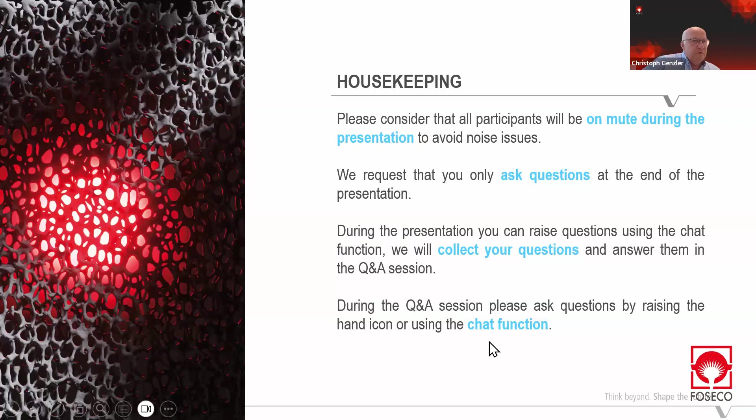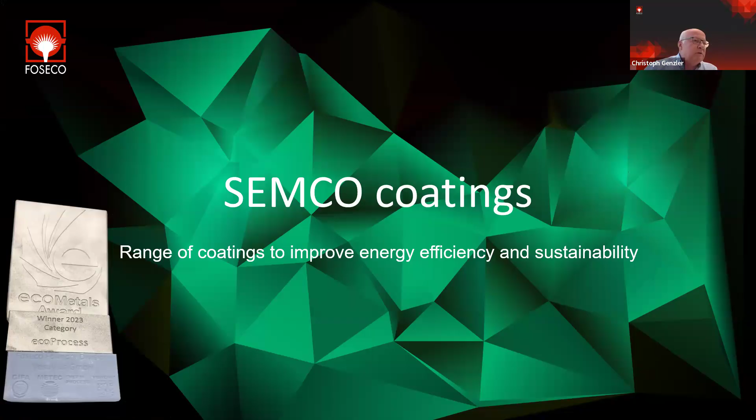Semco coatings, what are they? They are a water-based product range within Foseco, which we actually reintroduced back in 2023, and we won the EcoMetals Award for that during GIFA. What is the motivation behind that? Well, the motivation is definitely that molding core coatings influence foundry manufacturing cost dramatically. It is a known fact, but the influence on sustainability is not always that obvious.

So listening to our customers and their demands, new features of coatings have been developed in response and are now widely appreciated by users, such as Semco CC for color changing coating on drying, so you will see how the coating can actually change color while it's drying. FD, Semco FD for faster drying, obviously faster water-based coating drying. And the last feature, which is pretty much standard by now, is the FF version, which means we will not have a coating from Foseco supplied that releases formaldehyde while it is drying.

What is the Semco coating range? In general, a new family of water-based coatings designed to overcome the shortcomings of traditional water-based solutions. These coatings help foundries to cut energy use, improve casting quality, and thus reduce operating costs and scope 2 and 3 carbon emissions. I'm coming to what that really means. With the development of biocides that do not release formaldehyde anymore while we dry the coating, they also improve the overall health and safety in the foundry as a nice side effect.

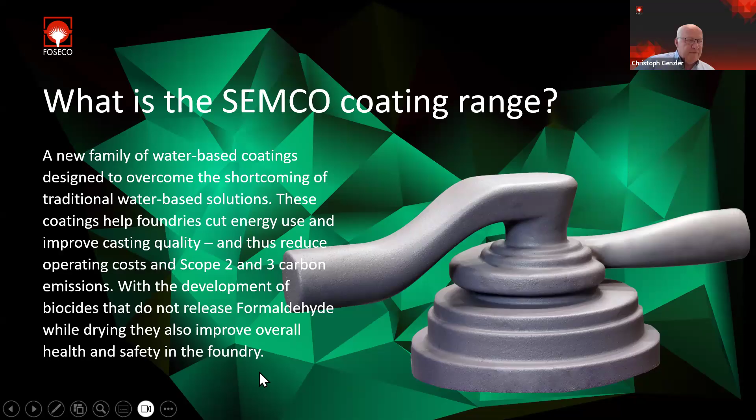Scope 2 and 3, maybe they are not that much known in Turkey, but in Europe it's really a big thing.

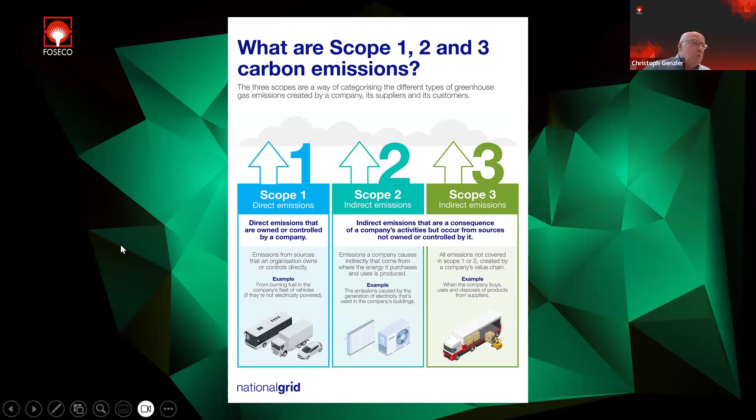Scope 2 and 3 CO2 emissions are indirect emissions common to your processes, like your molding line, drying furnace, core shop, or cupola. As soon as that releases CO2, the consequence is that you will have a scope 2 or scope 3 emission level, which in Europe at least we sell certificates for. So it's quite a cost-intense feature.

What can our coatings do? Our Semco coating range that I'm trying to introduce to you will help minimize 50% of the drying time. In other words, it will dry 50% faster compared to conventional water-based coatings. It can save up to 20% energy on drying, and in terms of formaldehyde, it will reduce the formaldehyde emission by a minimum of 90%.

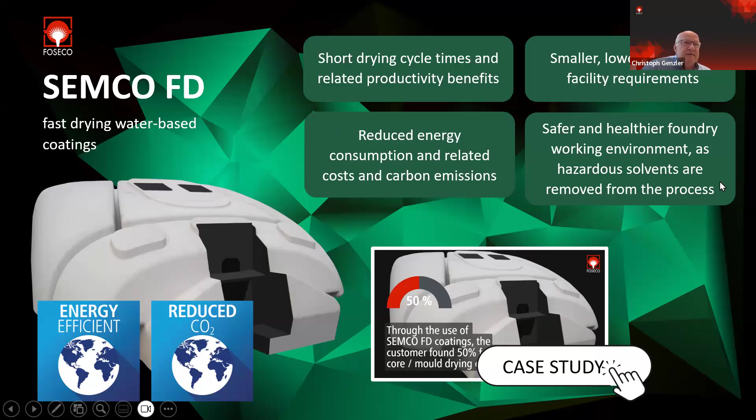Okay, let's go into more details. Fast drying coating - what does that mean? It's a water-based coating applied by dipping, brushing, flow coating or whatsoever, and it will reduce the drying cycle time and offer related productivity benefits. It will shorten or reduce the cost on drying and facilities that you need for drying. It will definitely reduce energy consumption and related costs, and it's a safer, healthier foundry working environment as hazardous solvents are removed from the process.

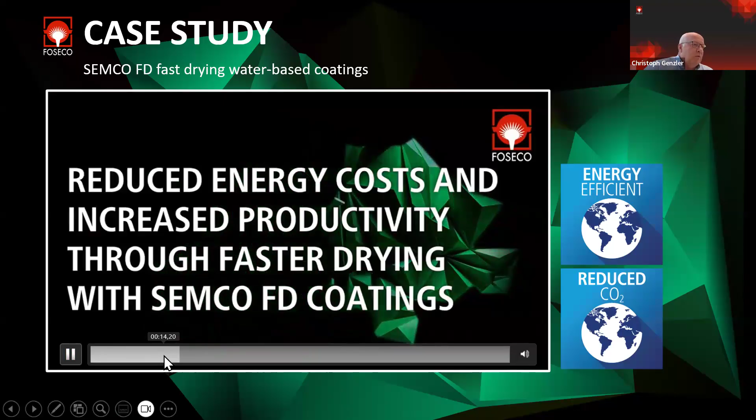Here, I hope you can see the video. It's a short case study on a windmill casting - actually a core made for wind turbines, a wind turbine casting that was coated with Semco FD. Please bear in mind, let me go back, that you see a whitish surface, because I'm coming back to that.

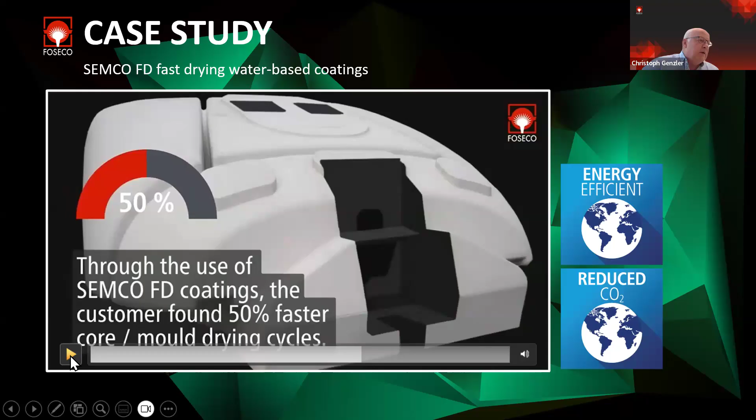The challenge was, and still is, the customer wanted to improve core shop output by accelerating the coating drying rate, and we had to do something. We had to invent the faster drying water-based coating. In this case it was designed for flow coating application, and with that feature of fast drying we enabled the customer to get 50% faster cores or molds out of his core shop or molding line, improving his productivity. As a side effect, we significantly reduced CO2 output due to much less energy consumption in the drying process itself.

Yes, Semco CC for color change coating. We will visualize very nicely the drying process. We have saving potential on the drying temperature and drying time - I'm coming to that. We can, with that feature, further reduce CO2 emissions and optimize energy consumption. It is a reversible color change.

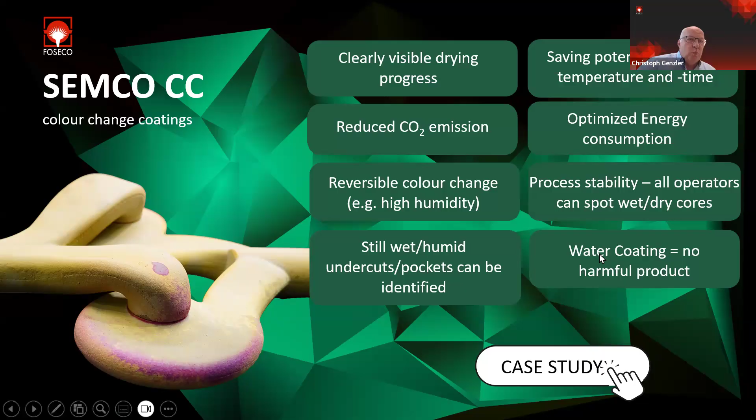That means, for instance, in high humidity seasons like autumn when it's very humid, you will see that the color of the core changes back to the wet color. It also employs process stability, meaning pretty much all operators can spot wet and dry core areas. Still wet or humid undercut pockets can be identified, which reduces the risk of facing gas defects. And it's a water-based coating, so it's not a harmful product at all.

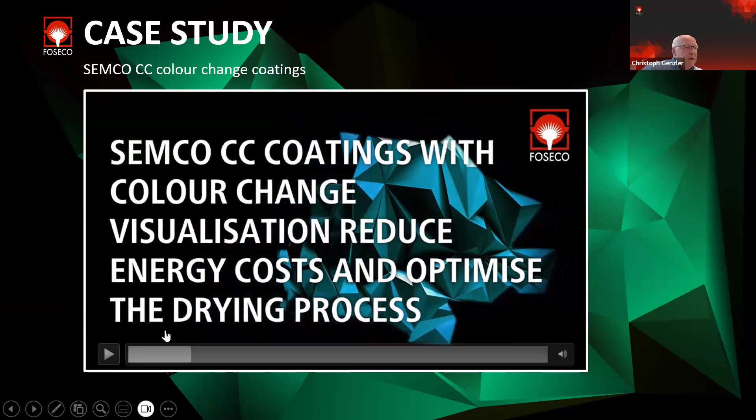Here, once again, the case study. Coating with the color change visualization reduces energy cost and optimizes the drying process. That's a pump housing from a German foundry called Baumgarten, and the coating you see here is designed for dipping.

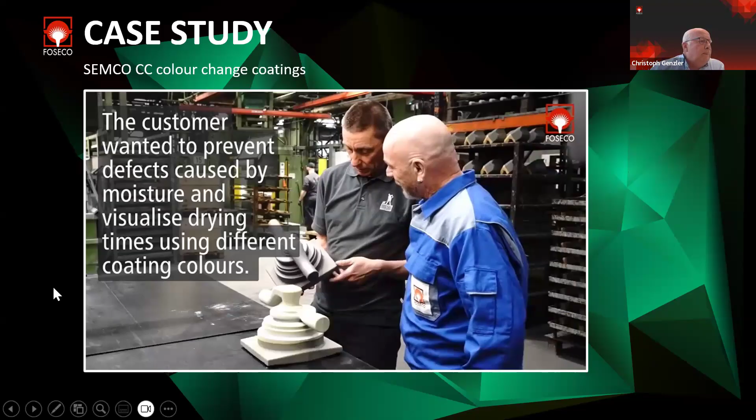Now what you see already is a core that's just coated, in both a wet condition and a dry condition. The customer wanted, as a motivation, to prevent defects caused by moisture and to visualize drying, which was in those days a nice request from the foundry that we, I must admit, hadn't really thought about before. So as a side effect, we could optimize the drying process.

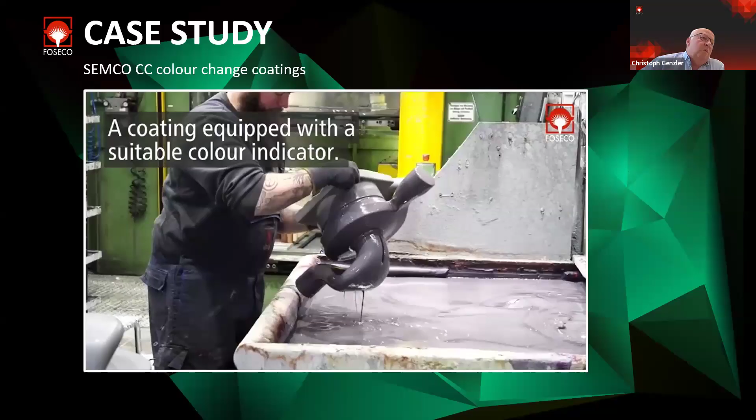You see, it's quite a nice flowing dip coating. In wet condition it's grayish purple, sort of. Now this is what I mean - still wet surface, dry surface. As soon as this water spray, basically in the hand of my colleague, gets sprayed on the surface, you see the color changes back to purple, to the original color, which may not seem important at first, but I will show you where it really makes sense.

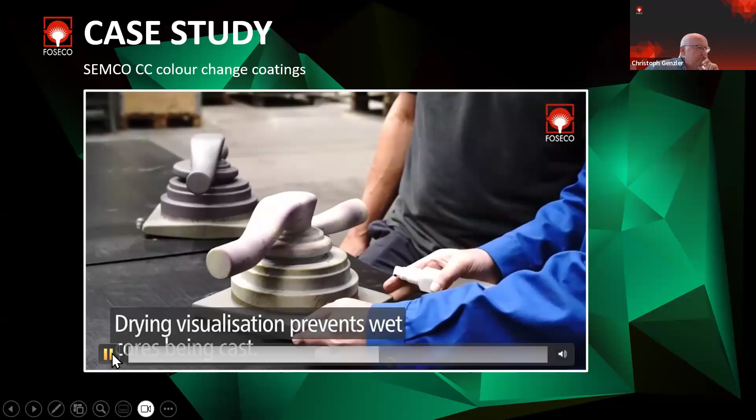Still wet surface - talking about the flow regime of the coating, how the coating is actually leveling.

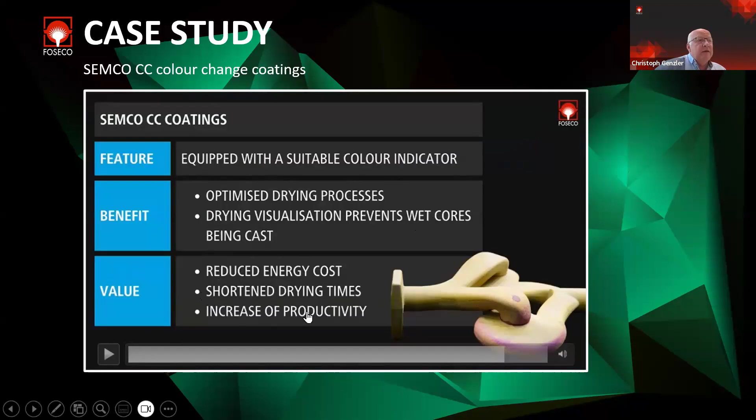So the coating itself showed quite nice benefits, such as optimized drying process, drying visualization prevents wet cores being cast. We had reduced energy consumption by 20%, shortened the drying time, and increased, of course, the productivity.

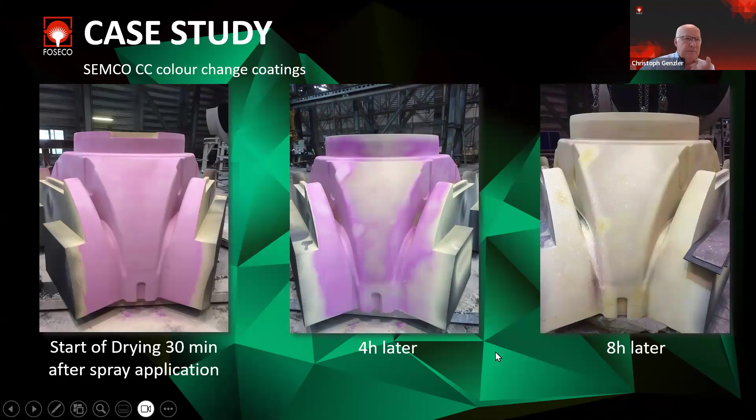Now the same feature applied for big molds or cores. Here, once again, that's a hub core for a windmill casting. You see the coating being applied. It's kind of pinkish, but as soon as you start the drying process, you can visualize very nicely how the drying progresses over that period, whatever the period is.

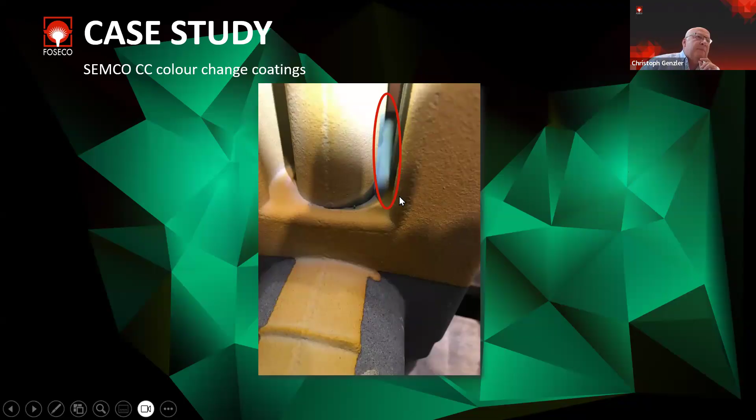Now, as a nice side feature coming from that development together with the Baumgart customer in Germany, we discovered that in particular in areas that are not that obvious and usually overlooked by an operator, you can very nicely spot still wet patches on the core surface. In this region, in this pocket, you still see nicely how the coating, after drying, after being in the drying oven, is still wet.

So from that perspective, just with the coating, with the color change coating, we were in a position to optimize the drying process. Having said that, what we also discovered is that while the coating is dried, the color change continues. In other words, the hotter the oven environment is, the darker the color becomes.

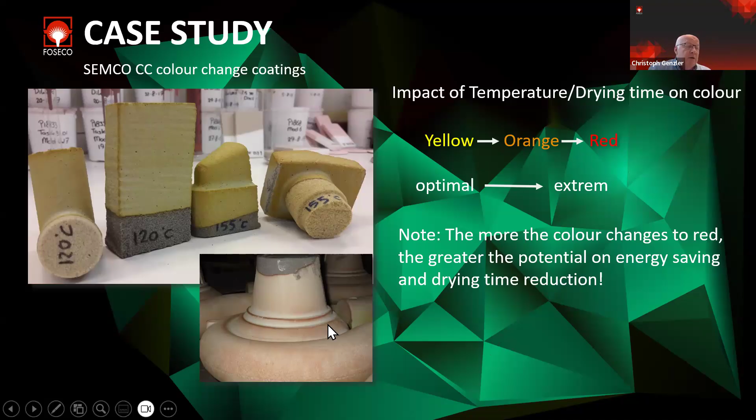So for instance, a normal dried core set at 120 is pretty yellow. The more energy put into drying in that furnace, the more that yellow changes to orange and furthermore develops into red, like you see here. So the more reddish core surface you see after drying, the greater the potential for energy saving, and of course still reducing drying time in the furnace.

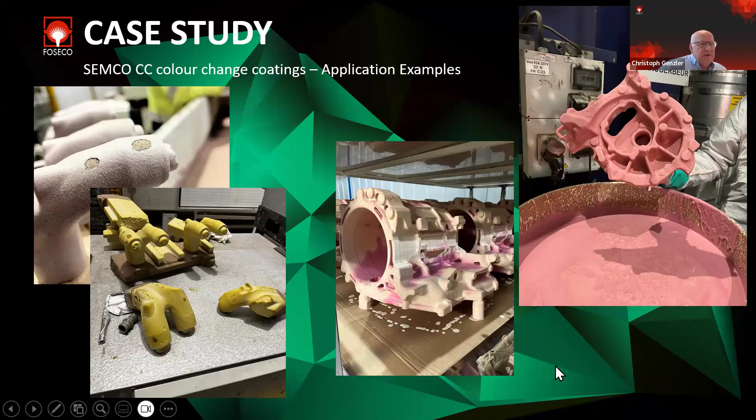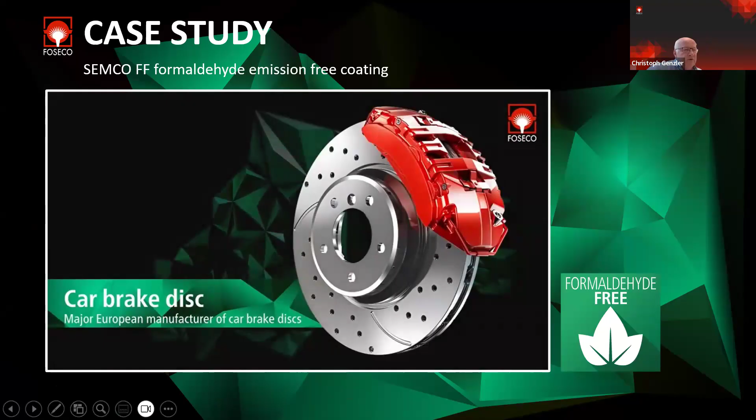So we had to do something, and we developed a biocide basically inside the coating that does not release formaldehyde during the drying process anymore, and hence we reduced the released formaldehyde gases by about 90%.

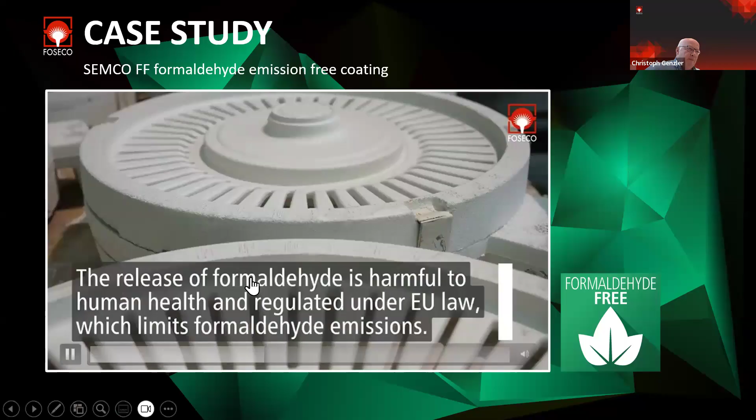I don't want to bother you with that so much. It was a new EU law. Yes, our solution was basically that we had reduced almost all formaldehyde emissions, and we had enabled the customer to comply with the latest EU regulation. Of course, for the operators, it was much better for the workspace as a working environment, and we could avoid the investment of costly rectification measures such as an afterburner and these kind of equipment.

Yes, so for you, I would like to remember, or make sure that you remember, that all these Semco coating ranges can be tailored to your customer demands. So regardless of the application, whether it's flow, dip, spray, brush, whatsoever, we can tailor make all these different features into your coating that is designed for you. And of course also bundle, say, fast drying with color change, or just color change, or just fast drying. That is then dependent on the demand of the individual customer.

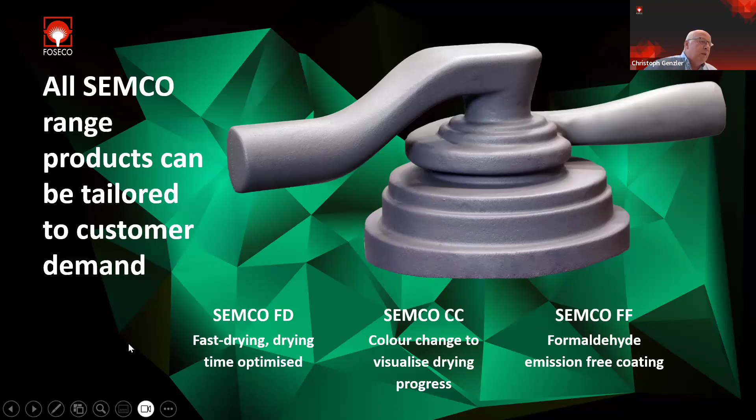Having said that, I told you at the beginning I would also like to introduce you to something that is really required to optimize the coating application. Nowadays, coating is more or less a cost-related feature in the casting manufacturing process. To get the best and biggest benefit out of a coating, that is always a gamble, so to speak, whether or not your operators are fully skilled and experienced enough to optimize the application.

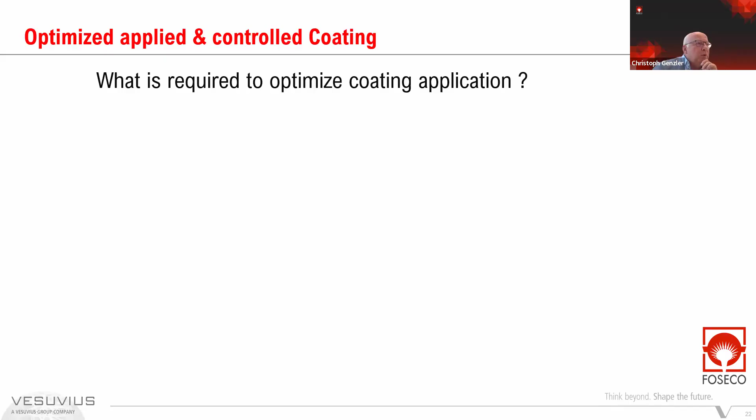From our perspective, to apply a coating in an optimized way, you need kind of an automation to control, to adjust, and maybe also to prepare the coating that is coming into your facility, into your plant. In that context, we have designed, as you might know, the so-called ICU. The ICU stands for intelligent coating unit, and that is automating the coating application.

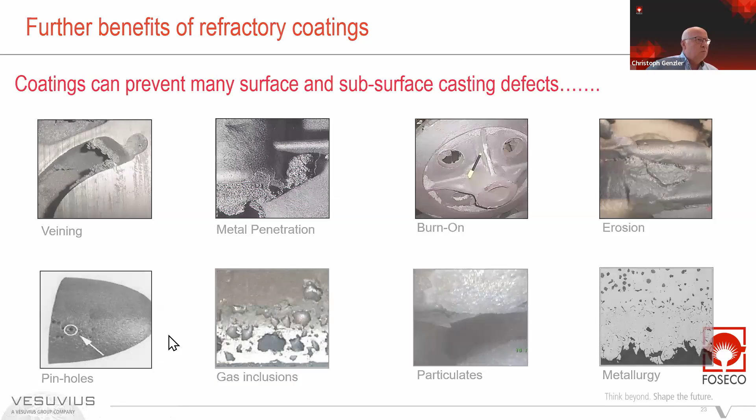This automation will help the coating to prevent many surface and subsurface casting defects like veining, penetration, burn-on, internal particulates, metallurgical issues, erosions, and pinholes, because once the coating is not properly applied, it can create problems itself. It can create runs and drips, brush marks, cracks on the corners, foaming, scabbing, poor adhesion, sedimentation, and blistering, and all these types of defects.

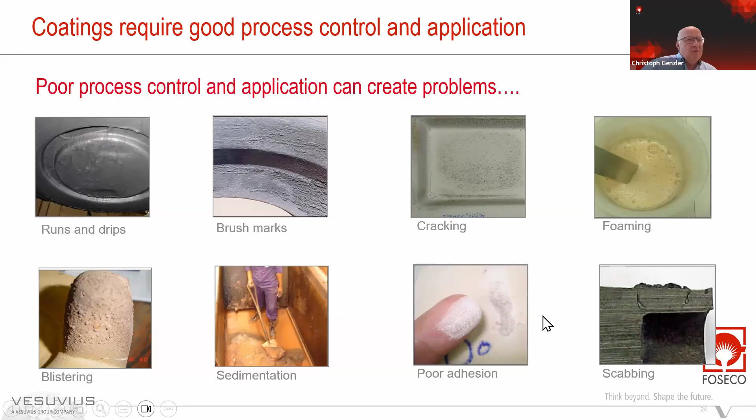That is why we introduced the ICU, that helps to automate layer thickness measurement. The layer thickness measurement is usually and ideally done by using a layer thickness gauge that helps to determine the wet layer thickness. A too thin applied coating layer makes the coating not really effective. Too thick and the material is wasted, plus the risk of dimensional issues, scabbing, excessive runs and drips. So a wet layer thickness and the related dry layer thickness is a very good proxy, a very good measurement, for the dry layer that is ultimately important.

Normally, in your core shop, on your molding line, you apply a Baumé or a flow cup kind of measurement to determine parameters of the coating. These parameters are then viscosity or Baumé density, which gives you an idea about the layer thickness you apply. Both methods are open to operator interpretation, which is in itself quite a risk.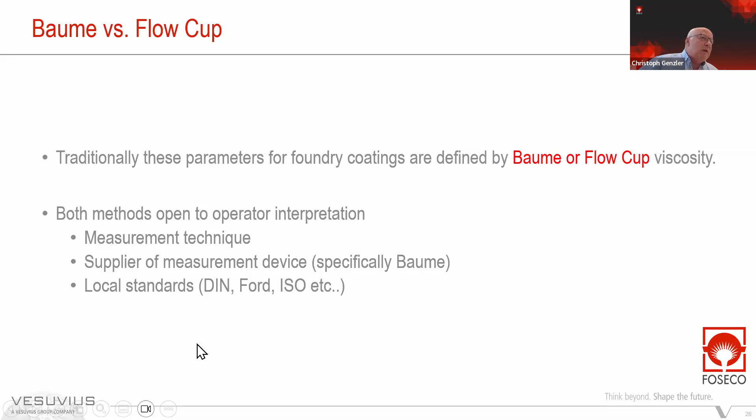We have local standards in terms of the flow cup viscosity, like DIN cups, Ford cups, ISO cups, and so forth. In order to remove all that confusion, I think the best way is still to use density as the ultimate coating adjustment measure. I will show you why.

Just imagine that in your process you have a specification of the coating, either viscosity or Baume. In this case, Baume is 28 plus minus 1, or viscosity of 15.5, which is already quite accurate, plus minus 0.5. In both cases, within that specification, you will achieve a wet layer thickness that has a difference of about 70 microns. Now, some of you might say 70 microns is not really that important, but these 70 microns will determine whether your casting gets out as a good casting or might see some issues, some problems.

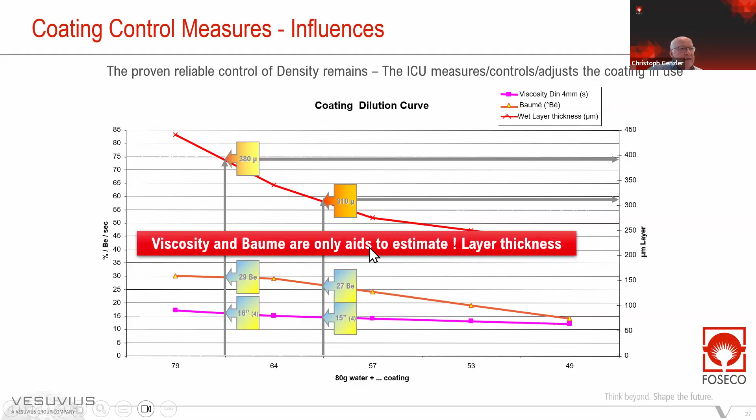Viscosity and Baume are only aids to estimate layer thickness. Because at the end of the day, if you compare that to the density measure, you see that density perfectly correlates with a dry layer thickness.

The correlation is kind of logical, because at the end of the day you apply solids, and the solids are then determining the density of the applied coating layer. So the density correlates wet and dry coating very, very accurately.

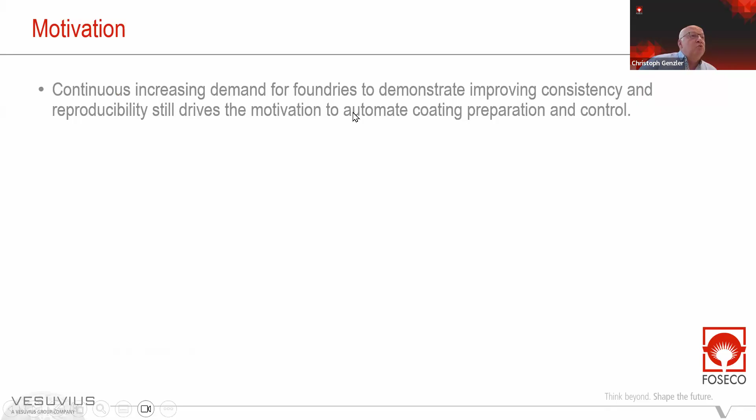Now I'd like to introduce you to the working principle of the ICU, the coating automation. So to make sure that you understand our thinking behind that process, behind that machine - the motivation, once again, is the continuous increasing demand for foundries to demonstrate improving consistency and reproducibility, which still drives the motivation to automate coating preparation and control to a very high degree.

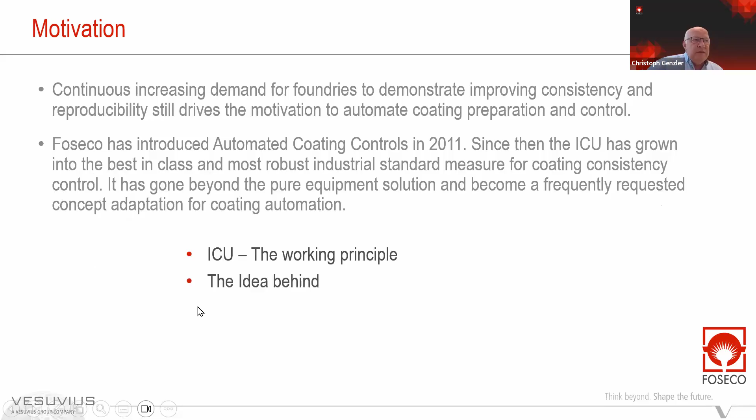We introduced in 2011 already the concept of coating automation. Since then, the ICU has grown into the best in class and most robust industrial standard measure for coating consistency and control, and it has gone beyond the pure equipment solution and become a frequently requested concept adaptation for coating automation. So I'm going to show you now the working principle, the idea behind the ICU itself, some options, and maybe if we still have time at the end, the applied concept.

Now, the working principle is a little bit down to physics, and it's basically down to this equation, and how this equation develops is shown in that quick short video sequence.

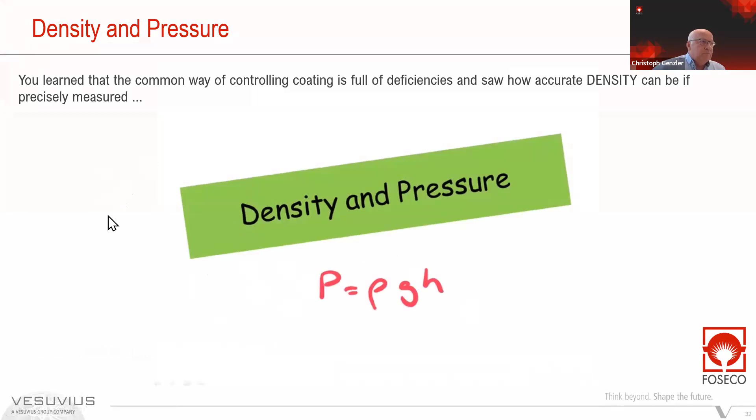Hi guys, today I want to talk to you about density and pressure. So what is density? Well, density is the ratio of mass to volume, and here we've got a...

Excuse me, can you hear me? Can you hear this voice? Yes, the sound is coming, it's okay, clearly coming. Okay, thank you.

The equation to calculate density, with the symbol rho, is measured in kilograms per meter cubed. To find out the value of density, we take the mass of an object in kilograms and divide it by the volume of the object in meters cubed.

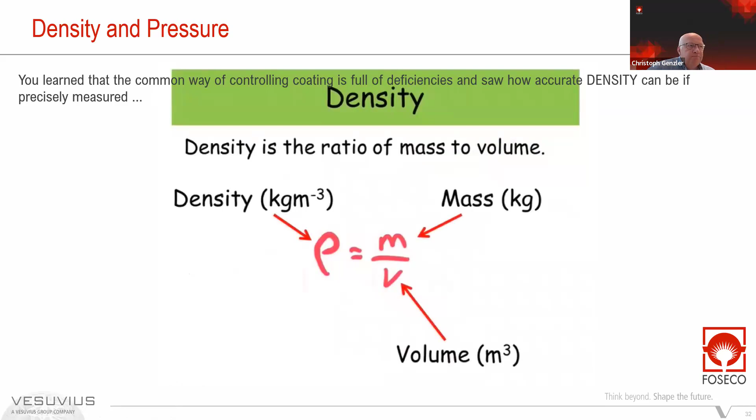So what about pressure? Well, pressure is the ratio of force to area. Pressure, measured in pascals or newtons per meter squared, is equal to the force divided by the area in meters squared.

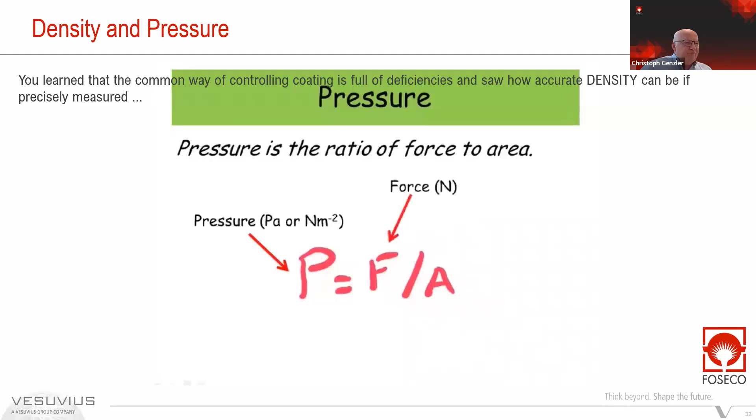The relationship between pressure and depth: for a given liquid, pressure is directly proportional to the depth or the height of the liquid. In other words, regardless how deep in a dip tank, in a coating container, wherever you go, you have always the same pressure to height proportion.

So pressure equals rho GH, and I'm going to show you where this equation comes from. If we've got pressure and height in a liquid, the gradient of this graph, which is pressure divided by height, is actually gravitational acceleration times the density rho of the liquid. So the further down we go, the greater the pressure.

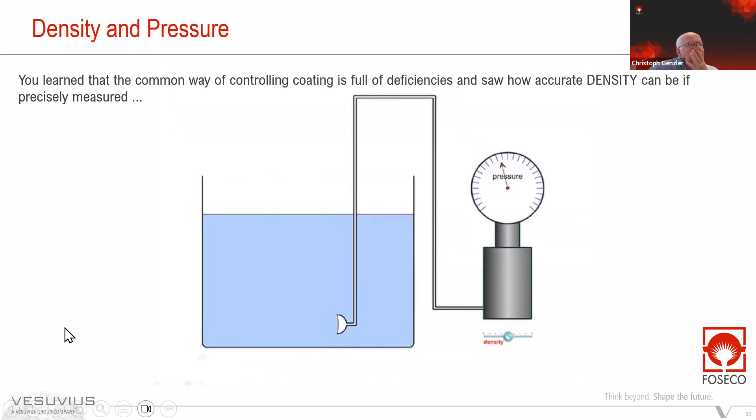Obviously, the further down we go, correspondingly the equation changes, and the density will remain the same, calculated down to the same value, okay? And if I've got a liquid with a higher density, it will also have a greater pressure. So pressure equals rho GH.

Where does that equation come from? Well, firstly, you think of a cube with a weight or force acting down at the bottom there. Our cube of liquid has got dimensions L, so it has a height of L, the width, and the length all of L.

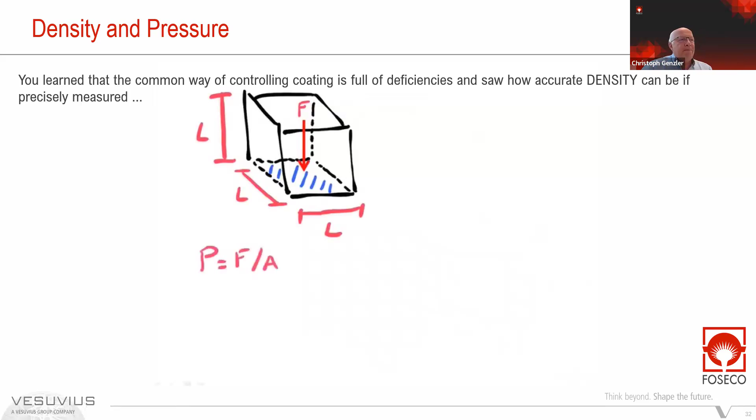So we know pressure equals force divided by area, and in this case the force is equal to mg. We also know that the density is equal to the mass divided by the volume. Rearranging that, we get the density times the volume is equal to the mass, and we put this all into our equation at the very beginning.

So we get pressure equals rho v times g divided by a. We know a is equal to L squared and v is equal to L cubed. So pressure equals rho L cubed g divided by L squared.

We can simplify this as rho Lg. And what's L? Well, it can be the height of the liquid, so we get pressure equals rho GH. Simple as that. So at the end of the day, the pressure is proportional to the density, the gravitational acceleration, and the height of the liquid.

This all means basically that in the ICU, where we use multiple pressure sensors, we can check densities at different levels. The biggest advantage we get through this kind of arrangement is that we measure density 1, density 2, density 3, and in case these are not the same, meaning the coating has a problem in terms of sedimentation or bacteria attack, we get an alarm and immediately either start the mixing exercise or make some other impact on the process.

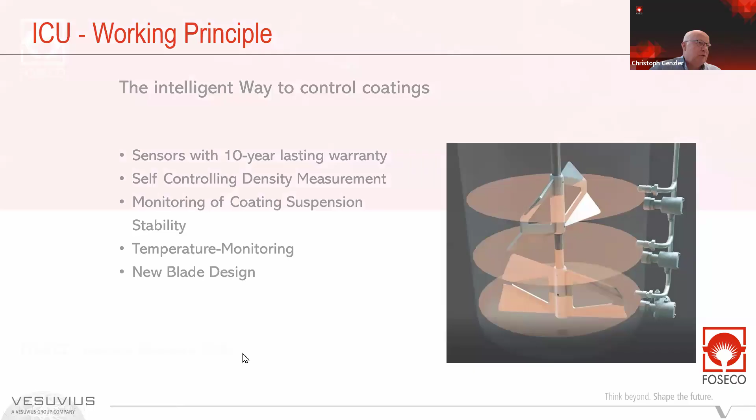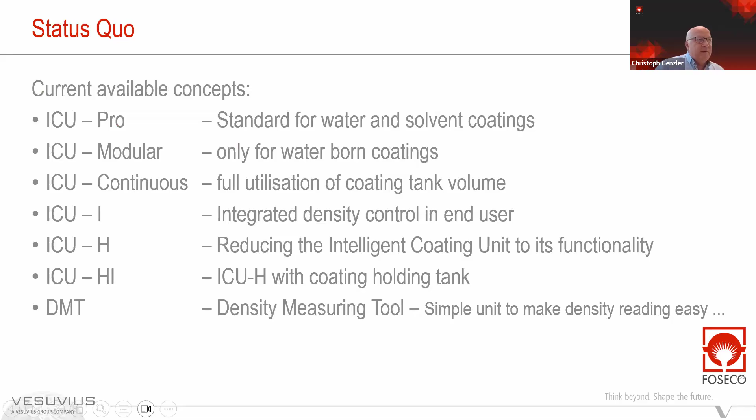So in that context, the ICU introduced back in 2011 has now grown into a rather big family. In order to not confuse you too much, I'd like to introduce you to these 5 different features: the continuous ICU, which is sold pretty much everywhere globally, and then the latest requirements on the integrated feature, the ICU-I, reducing the ICU basically to its heart, its brain, and how we can introduce that heart into a coating holding tank directly.

And the DMT is just a density measuring tool, very simple to use, and maybe replacing Baume sticks or viscosity cups in the near future.

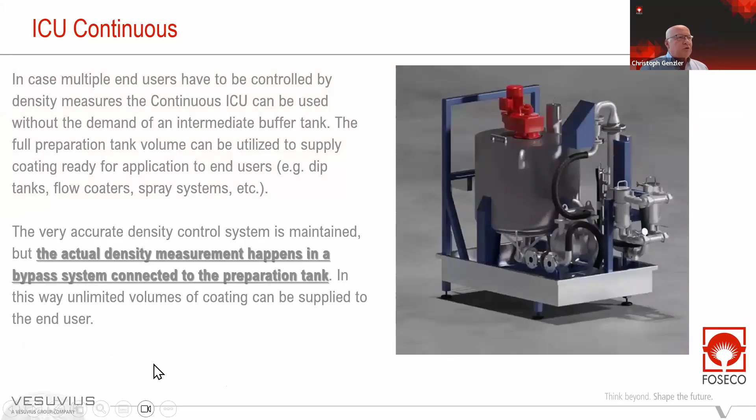The ICU continuous looks like this. We learned during the introduction phase that if we connect a lot of different end users, such as dip tanks or flow coater stations, to only one ICU, we had to stop the coating supply from the ICU to the end user when the coating was consumed - in other words, when we had to refill the volume in the holding tank.

With the ICU continuous, we don't do that anymore. We can utilize the full capacity of the tank to supply the end user - flow coater station, spray equipment, or dip tank, whatsoever - because we have removed the measurement from inside the tank into that measuring pipe. So there's always a 24/7 continuous, safe circulation of the coating inside the tank through that measuring pipe, and the coating gets adjusted just by measuring inside the pipe. This enables us to supply the end user continuously, which is very important. I think with other machines out there, that's not possible - it's just possible with the ICU.

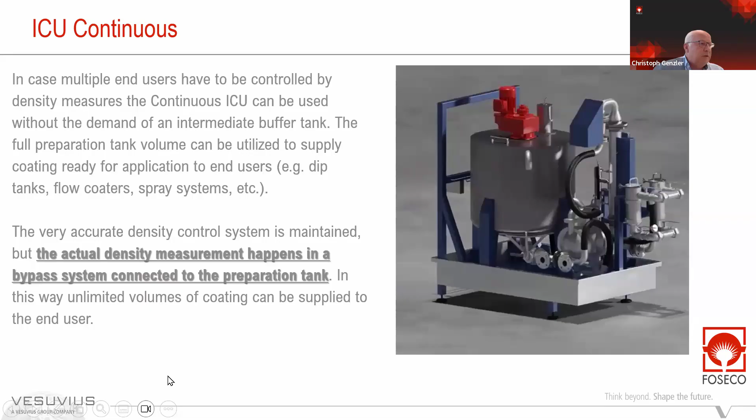On top of that, there are still available options, such as a spillage containment tank underneath the device, and the coating inlet into the tank guided by the stirring shaft just to reduce splashes.

Sensor cleaning nozzles, 3 instead of just 2 sensors. We have Vega pressure sensors, Wilden membrane pumps, covers for the sensors, temperature monitoring for the coating in the tank. Quite interesting, an external stirring motor socket like this, and the timer for the mixer sitting on the container. So when you have a container supplied by us and the corresponding mixer sits on the container, the ICU can organize the mixing sequence onto that container.

Of course, there's also a single or double filter function, UV treatment for disinfecting water - quite important sometimes to reduce bacterial attack, especially in summer. We have a built-in cleaning function and a built-in verification or self-testing function that helps the ICU always supply the correct readings.

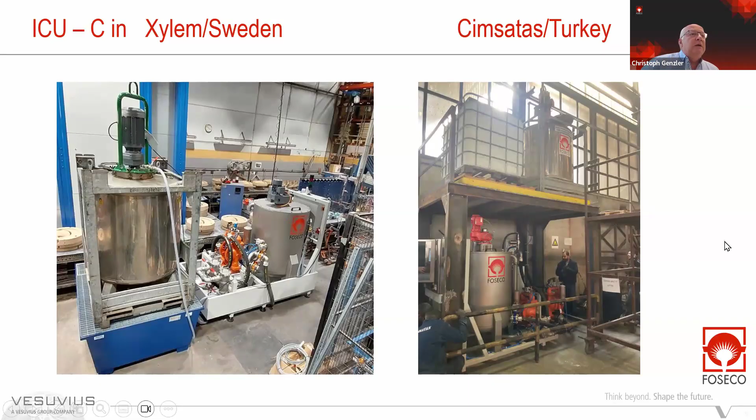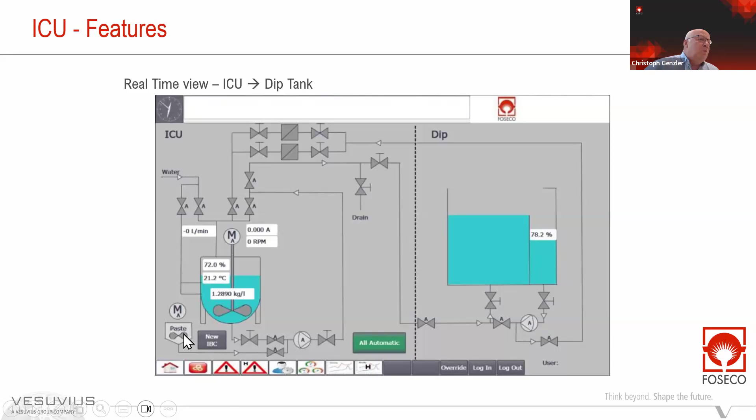Real-time view of the ICU itself. In this case, the ICU was connected to a dip tank, so you see we get the reading of how much the dip tank is filled, and different parameters of the ICU itself - the temperature of the coating inside the tank, the filling rate of the coating inside the tank, and the speed of the mixer and which function is currently being used, such as a pump or just a valve that opens and closes - plus a very simple press button exercise. So when the coating has to be changed on the container, the operator just presses a button, and that's it. The ICU does all the rest for him.

Having said that, we've also learned during the introduction that the maintenance department usually has different requirements, different demands, and this is the maintenance screen that is now embedded in the program to show that all the different components are running, and in which case they have to be maintained or controlled and so forth.

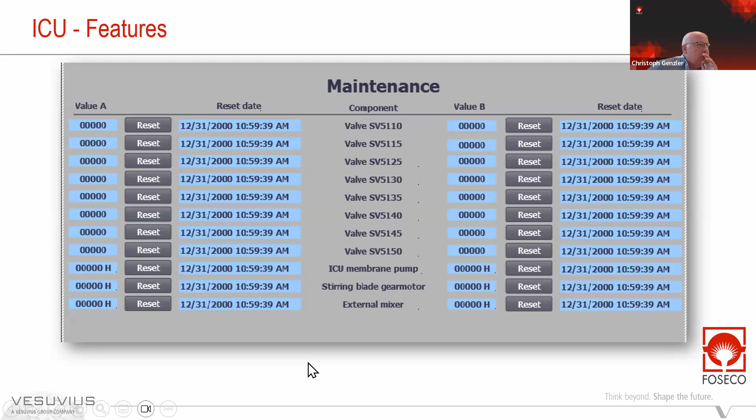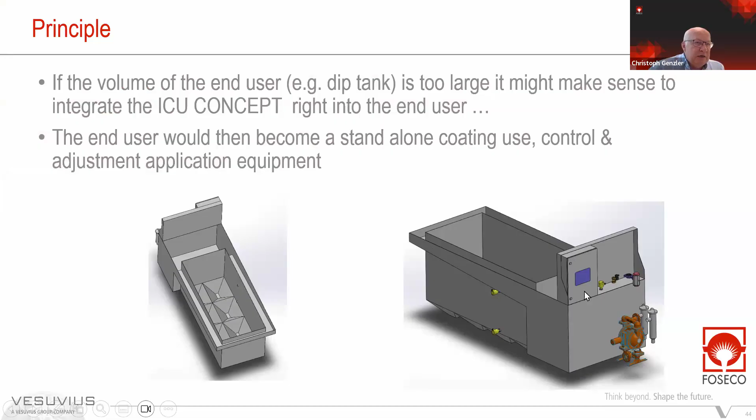We were talking about the ICU concept. The ICU-I, the integrated ICU, is one of these concept ideas where we basically introduce inside the dip tank just the two pressure sensors, and have the ICU brain, the intelligence, sitting on a side panel. And this is how it looks like.

We also attached a small flow coating hose, so in case smaller cores wanted to be or had to be flow coated, we could use this flow coating hose to just flow coat the core straight over the dip tank.

The ICU Integrated is one of the latest responses that we can supply to customers that just want to have the density control. Now, this comes with a control box, 2 pressure sensors, and some valves, and then it is directly connected, as you see basically in the integrated version, onto the process inside the dip tank.

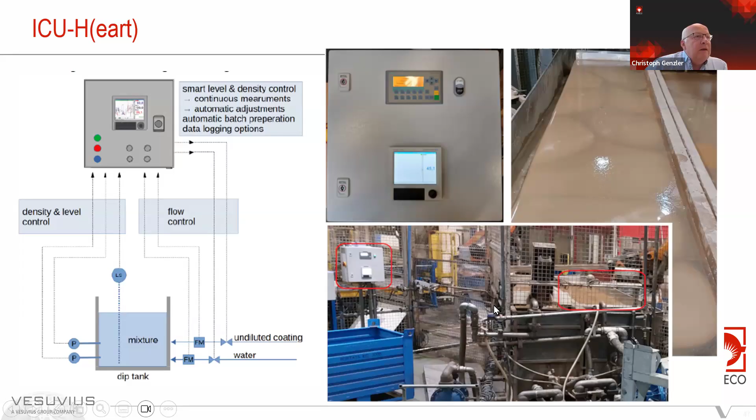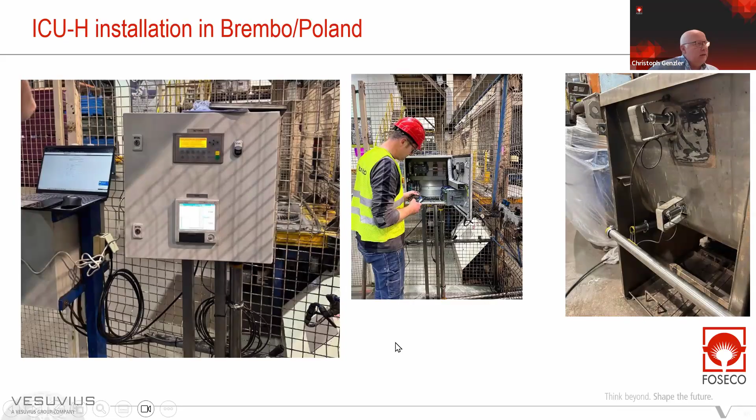Here is the intelligence. On the next slide you see the pressure sensors being mounted on the dip tank. This is the dip tank, by the way. So it's been built into that dip tank, connected with the brain, the intelligence of the ICU, and that's how we can integrate the ICU features, the ICU functionality, inside the dip tank. That's why we call it integrated.

Some customers do not have the option to have big dip tanks or flow coat stations. In these cases, we can supply the ICU-H, which means the heart, once again the brain, is integrated directly into a sizable tank where we circulate the coating, control and adjust it, and send it to the end user. In that context, it's a very small and flexible way of measuring density in a very controlled way.

Last but not least, the DMT stands for density measurement tool, now in its third generation, very simple to use. You just stick these two pipes inside the coating, wait some seconds, and then get the reading. You read density directly from the device, which I think is only available at Foseco. Nobody else, not even the paint industry or anybody else in the liquid industry, has this kind of feature to measure on site.

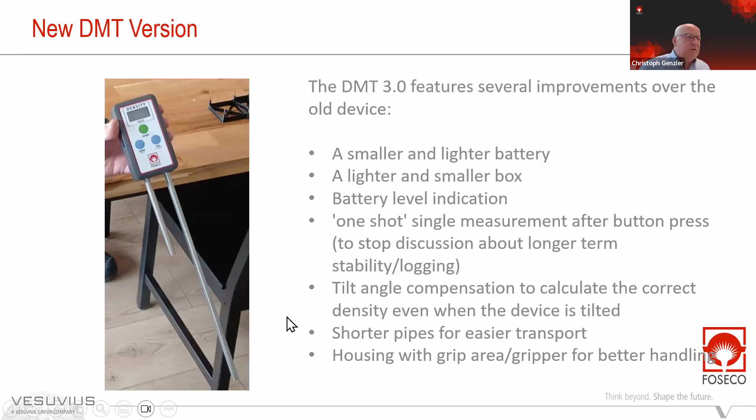The density. I must admit the device is not meant for continuous measurement. It is meant to replace Baumé sticks and flow cups, for spot-wise control, one-shot control basically, measurement after the button is pressed. It's very simple to use, and the size is a little bit bigger than a mobile phone maybe. It also comes with a battery, so it's quite simple to use.

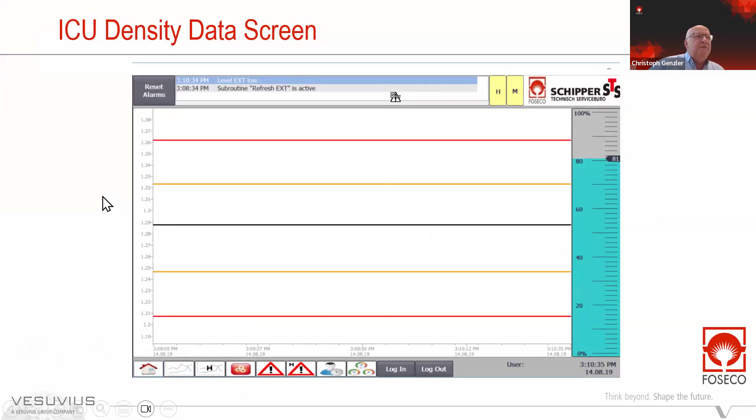Just to give you some ideas about the ICU functionality again, we have two different specifications on the ICU that we can set ourselves in whichever way we want. We have the alarm spec, which in this case gives a 5.5% alarm spec, and in this case it is the normal control, inner spec sort of, in which the ICU operates continuously.

In this case, very early in the process, you saw how accurate the ICU actually measures, at an offset of 0.04%. That is so accurate that you cannot even think about measuring this accuracy with a Baumé stick or with a flow cup. It's basically impossible for a human being to be that accurate.

However, I must admit, during that period, still within the introduction, I would say the offset of 0.04% is really the limit, because the machine starts to just control rather than monitoring, applying and readjusting. It just controls itself basically to death. So that does not make sense. Nice to see, but actually it's an overkill.

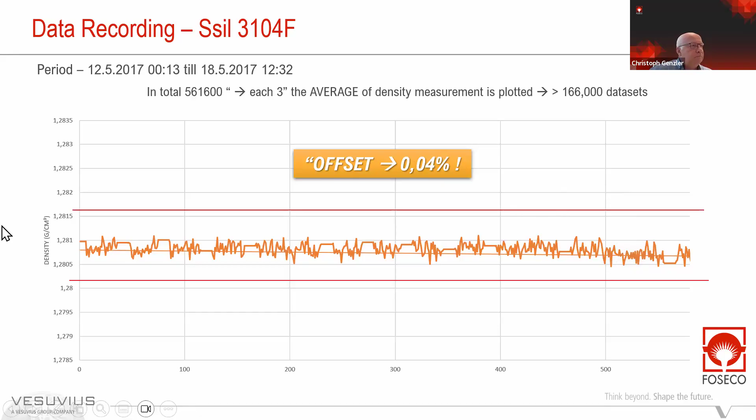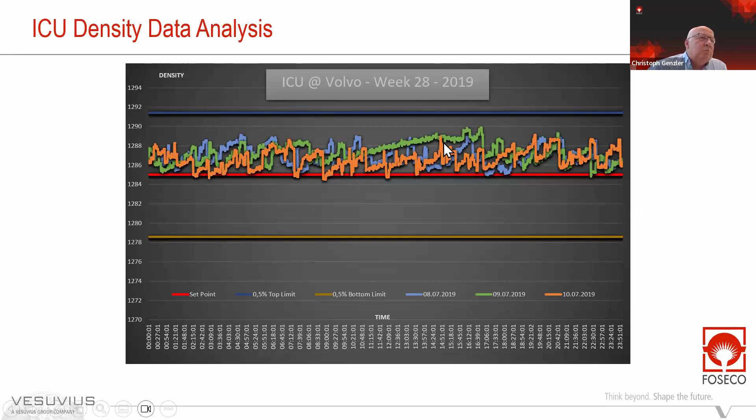So let me summarize then the key benefits of the ICU. It definitely helps to utilize the coating to the optimal degree. Excess consumption is avoided.

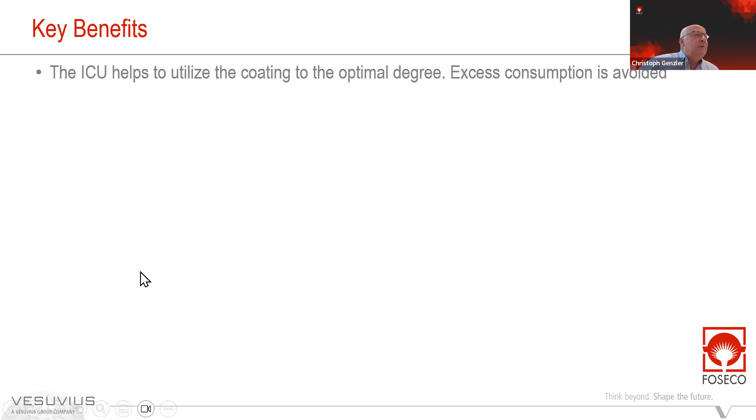The application layer thickness is maintained, meaning that you can optimize your drying because there's always the same drying speed, and the same layer thickness means also that you have the same performance against casting defects on all the cores.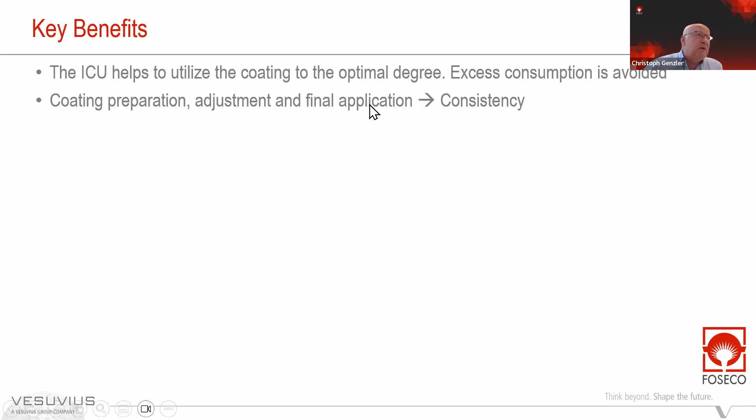The coating preparation, adjustment, and final application become much more consistent. The ICU works with the most accurate density measurement system in the industry. It's got a low maintenance level and a very low noise level, very easy to access.

It optimizes drying times, reducing energy and reducing CO2 release. Very simple to use, with 3 pressure sensors that test its functionality and supply sedimentation monitoring. We have data logging that lasts for more than a year.

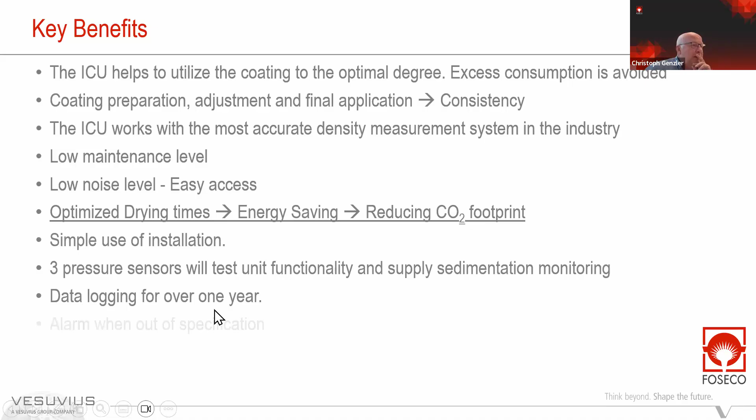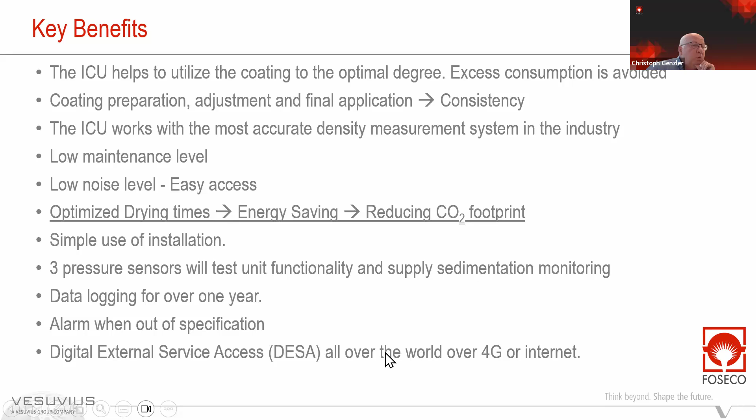And if needed, if requested, access to the machine can be done via the internet. So regardless where you are, you can always watch and monitor what's going on with the ICU in your molding line or in your core shop.

It's got a great solid design, foundry proof basically. It's got an integrated mixer timer and empty container alarm in case you need to convert to a new one. Yes, it minimizes coating waste.

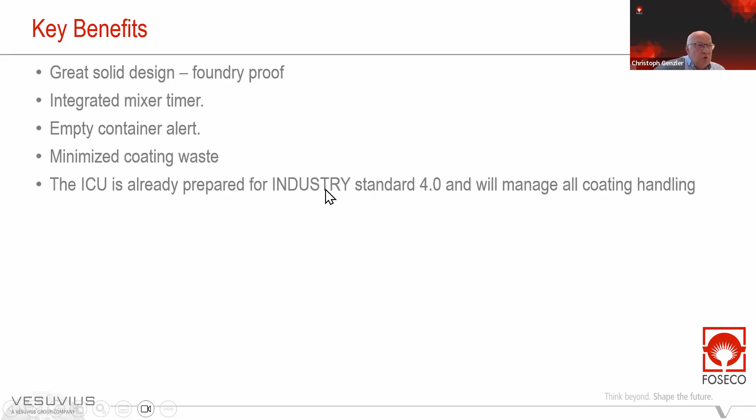The ICU is already prepared for Industry 4.0 standards. That means it can, if you want, talk to your other equipment in the core shop or on the molding line.

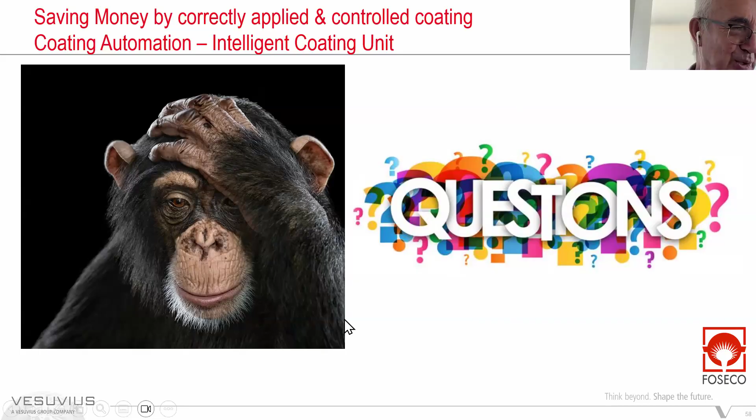The new thing is I see some traces of artificial intelligence. You did not mention it, but is it true that the intelligent coating unit is compiling too much info, and the operator has less to do?

Well, I would rather say the operator's life should become easier. Instead of taking all the responsibility into his hands, with temperature dependence, and maybe not being in the best shape on Monday morning or Friday evening, the ICU will still do the same job. So from that perspective, it's just more consistent and gives the operator a more relaxed time.

Okay, I am expecting questions from my colleagues. They started to write them down. During that time, we can go on chatting.

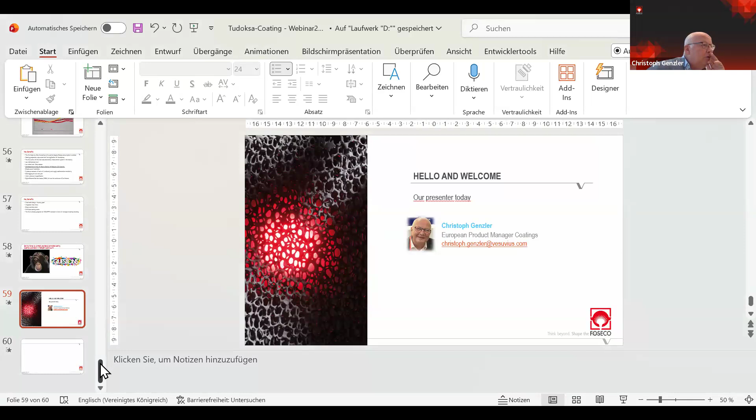So it seems that it is almost impossible to dismiss the operators in this operation. I'm not sure that's what you mean, that we can stop the operator's impact? Yes, we can. Let me just check, you still see my screen, yeah? Yes, we see.

In this case, we actually could release 1.5 operators from the line just because the ICU did the job of controlling, preparing, and measuring the coating in use on that line at Volvo. So that is possible for sure, and that operator can then do other jobs, other activities.

Okay, so the first question is coming from Mehmet Saadettin Turhan.

Christoph, the question is about whether there's any process to prevent the reduction in strength after coating and drying processes. He thanks you first for the presentation, then asks if there's a process to prevent any reduction of strength after coating and drying, to get some advice and opinion on these cases.

Well, to be honest, if the coating is applied, diluted, and prepared always in the same way, it should always have the same kind of strength levels or surface strength levels, if I correctly understand what you mean. Is that what you mean?

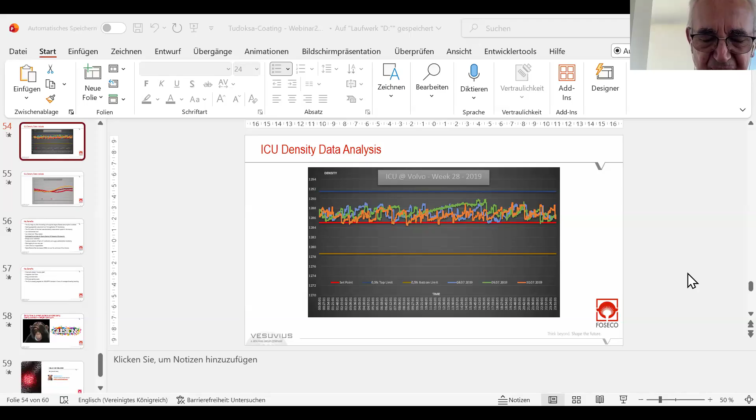What we have also learned—remember in the very beginning I told you something about the SEMCO CC, SEMCO color change—now, in order to optimize, let me see if I find that slide quickly.

In order to optimize the drying process for the customer, in this case to optimize the drying process for a cylinder head core package, a big one for the customer, we implemented the color change at the very beginning of the process, of the project, I should rather say.

That enabled the customer to optimize the drying speed to a degree that he could reduce cycle time by roughly 13 to 15 minutes. Can you imagine how many more cores that means and how the productivity improved in that case?

So this is an option to say, okay, we would like to optimize our drying process by a color change feature at the very beginning. Then once that is done, we can remove the color change again, and then you still run on an ideally optimized drying performance. Let me explain it also in Turkish way.

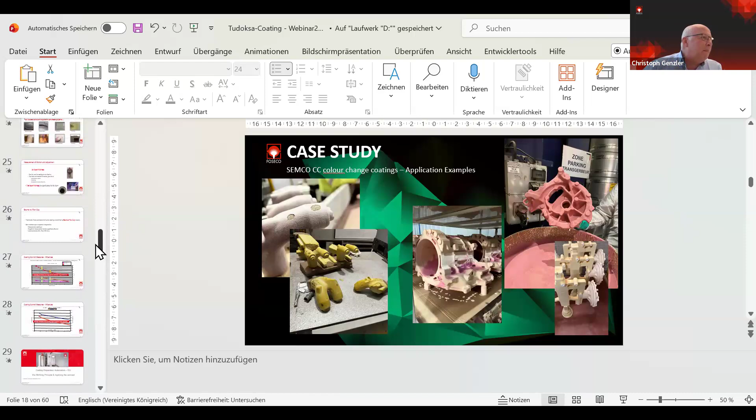Correctly, yes, that's correct. We are quite dinosaurs in the coating industry, sort of. We have found that with the application of Baumé or viscosity, we have always deficiencies on the application. And if the application does not work properly, usually the customer complains, hey, your coating is not working. So we had to find something that kind of automizes the application and gives us the ideal situation to have almost a readout that corresponds to the dry layer thickness, because that is definitely what we would like to control. With the density, we discovered that we have basically a direct correlation to the dry layer thickness. So yes, you're right, intelligence comes from the way of applying, density in this case.

Okay, related with this topic, there's a question asking, what if this measurement of density could solve our core expansion defects? Yes, oh, definitely it can.

How? Let's assume that you found the optimum layer thickness in your process, and you want to make sure that this optimum layer thickness, regardless of where that is, is always applied.

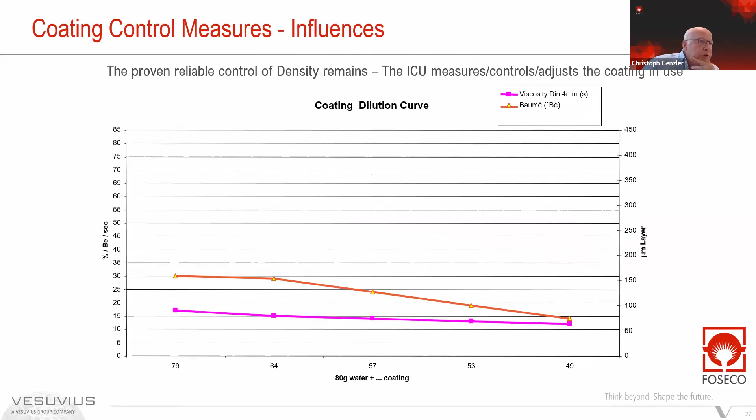In that case, the density helps you nicely to always have that optimized layer thickness to avoid veining issues and burn on. Scabbing is another thing - in wintertime, as an example, you have a rather thick coating, so Baumé as well as viscosity will increase due to temperature influence. This means that in wintertime usually the coating is over-diluted, so too thin, and you would apply less layer, although the specification is still met, because Baumé and viscosity in wintertime is pretty much temperature dependent. If that is met, you will increase that difference from not just 70, but say to 120 or even 150 microns.

And that definitely has a big influence on the dry layer thickness, i.e. into the core or coating performance.

One more thing, just a final statement: the brightest and most expensive coating in the world does not work if it is wrongly applied.

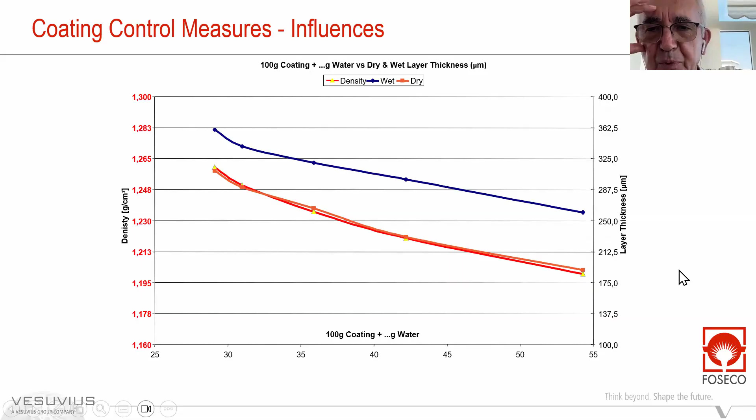Okay, yeah, okay. The question owner, Abdullah Turan, is indicating that especially on the cold box cores, is there a difference? Is there a different application for cold box, hot box, or warm box cores?

The expansion scabbing problem has been met on cold box cores. Your explanation is valid for cold box cores as well, isn't it? For all core binder systems and even molding binder systems that you can imagine.

Yes, once the optimum layer thickness is found, it is quite simple to put that into the ICU to make sure the ICU controls automatically adjust and measure the density to its optimum, so you always have this optimum layer thickness.

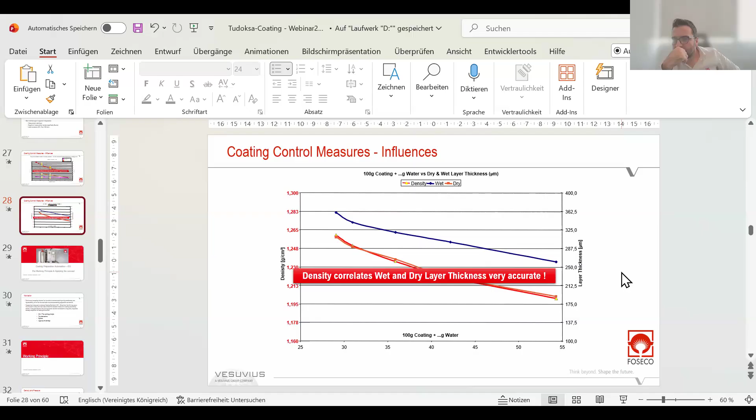The question is if there are any other measurement techniques besides what you presented for density measurements - any other methods that we can measure densities rather than what you explained during the presentation.

You mean instead of the pressure sensors? Yeah, exactly, any other methods how to measure. There is a quite scientific method employing what's called in Turkish a pycnometer. You have a cup defined of 100 milliliters. You put that on a balance and you just read the density from that 100 milliliters. But of course, this does not give you the chance to automate the measurement. With the pressure sensors, you can automate the measurement and get a continuous reading, per second or even per millisecond, of the product in use.